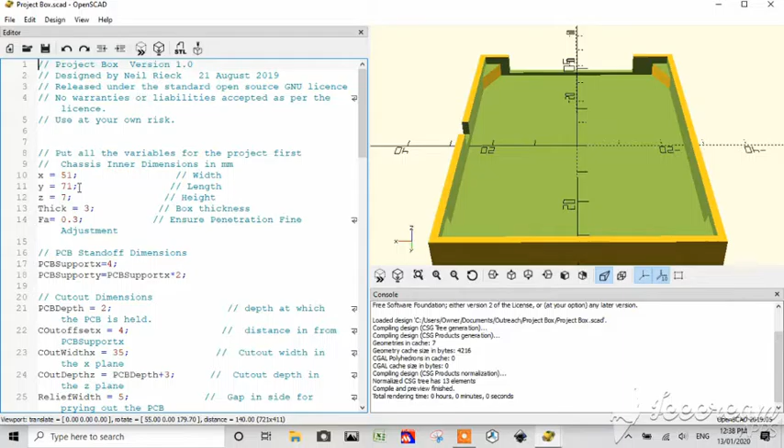Righto, let's get on with it. We have our project box in the dimensions that we want, 51 by 71, with sides 7 millimeters high. You can't see it, but the one we prepared earlier was 7. This is a slightly better design because it's got this cutout to accept the programmer, so we don't have to worry about cutting the box once we've printed it.

It's in the orientation we need to print because we've got this beautiful flat bottom which will sit on our bed. Now, don't worry if your design hasn't got that—the printer will make whatever temporary supports it needs to support the features of the print. It'll actually build a structure to support whatever it needs, and you'll cut that away later.

I don't want to spend too much time talking about this—I want to get into it. So we're just going to render this one more time. This is our render tool.

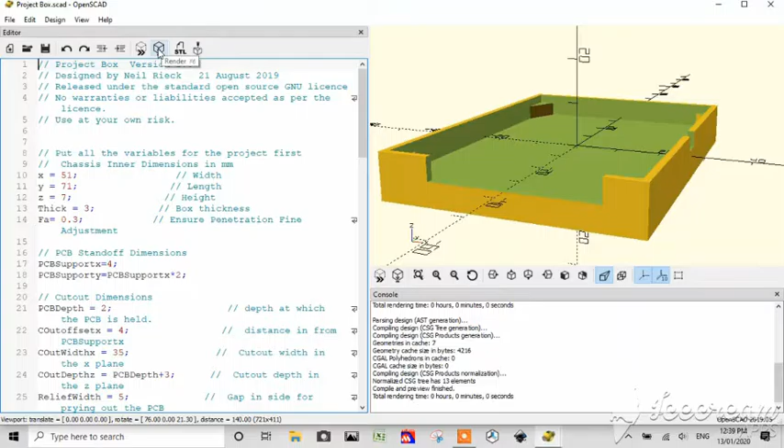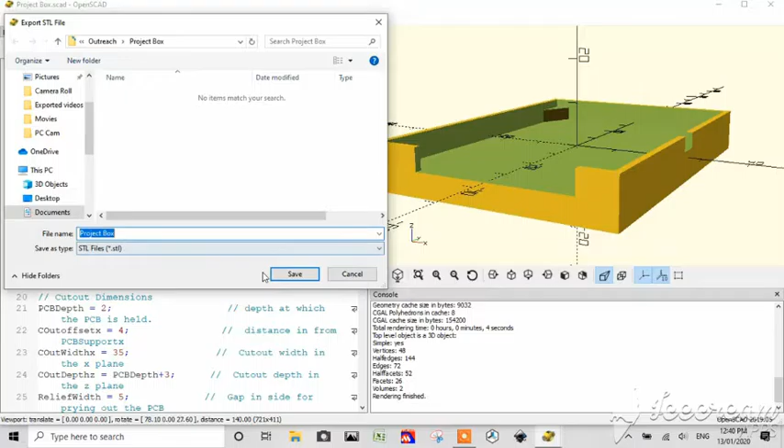So here we go, we're going to export this to STL. It wants us to give it a name, and I'm just going to call it nothing more fancy than Project Box. So I'm going to save that, and in a few seconds here we've got our box ready to print.

Now I'm going to open the Repetier software. Here it comes.

By definition, Repetier out of the box comes with a similar look and feel to what you've just used, except that all of the control stuff is on this side and all the preview stuff's on this side.

So we're going to do a couple of things now. We're going to load this file up that we've just created. We know it's in Documents, Outreach, Project Box. And here it is. This is our 3D file in a standard format that any printing system can recognize. And here it is, sitting beautifully on our bed, that's our bed in the center.

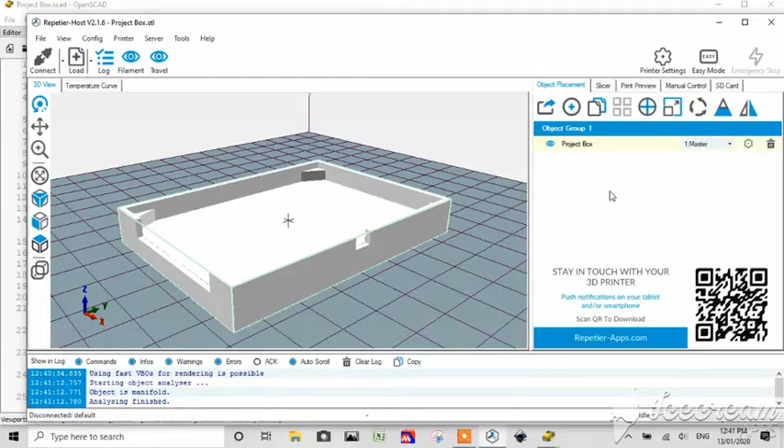Now we don't need to do anything to this. We don't need to change any of the settings in order to make this happen, because now we've got to slice this up into paper thin slices that the printer can use.

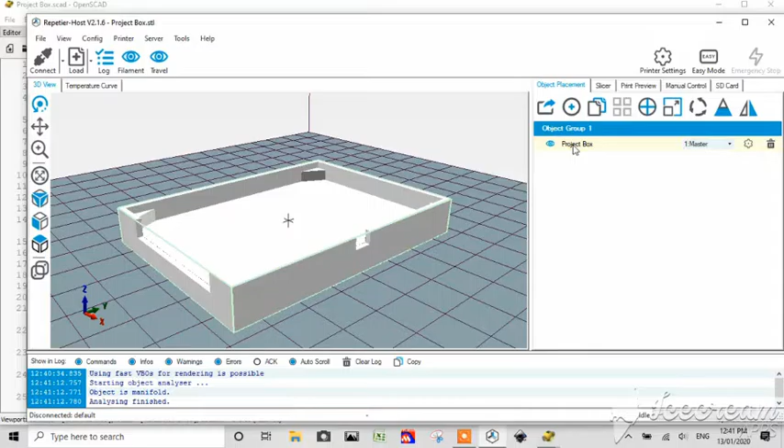So we go into slicing. Now back here I can actually make copies of it. You can copy a design and make multiple printouts, but I don't want to do that just yet. I'm just going to do one.

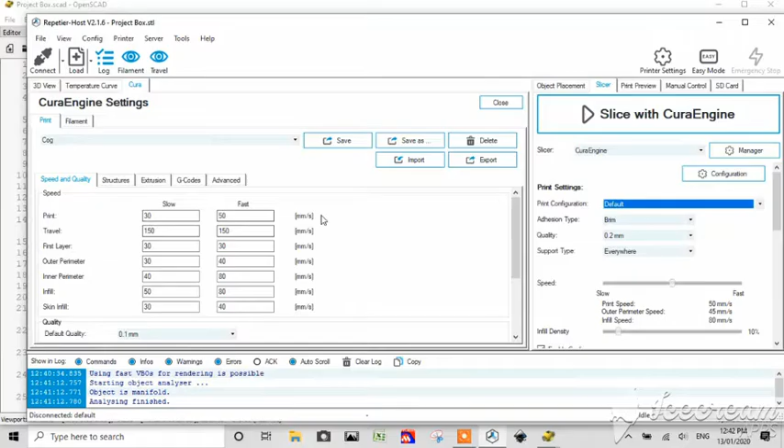Alright, I'm just going to go ahead and do this slicing. Now, I can ask it to use different engines to do this. Let me see this. Right, you can use Slicer, Prusa Slicer, or CuraEngine, and the default.

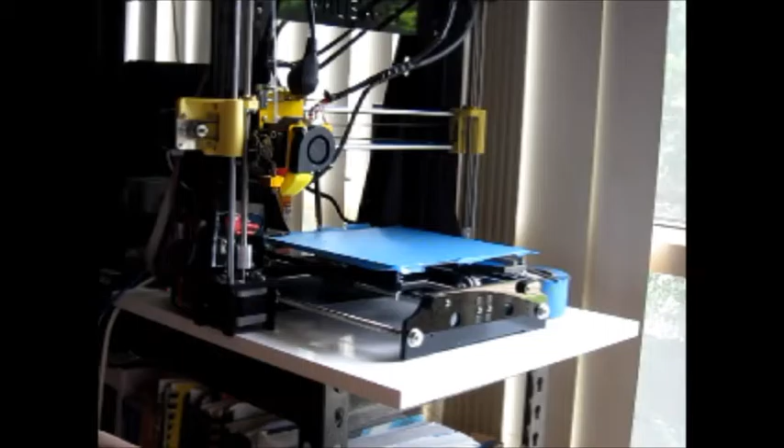And I've swapped the camera to a new angle. Now what I've done is I'm going to plug my printer in to my computer first using that USB cable that you just saw, and I'm going to turn the printer on and let it warm up. So what's going on is I've given it power.

I'm just going to point out a couple of things using this camera. I'm going to leave it in the tripod so you might be able to see a few things. Okay, so what's going on? We're not plugged in, that's the first thing I notice. Oops, let me try that again, just give me a second. How does this happen? Every time I go to use something, someone's had a little fiddle with things.

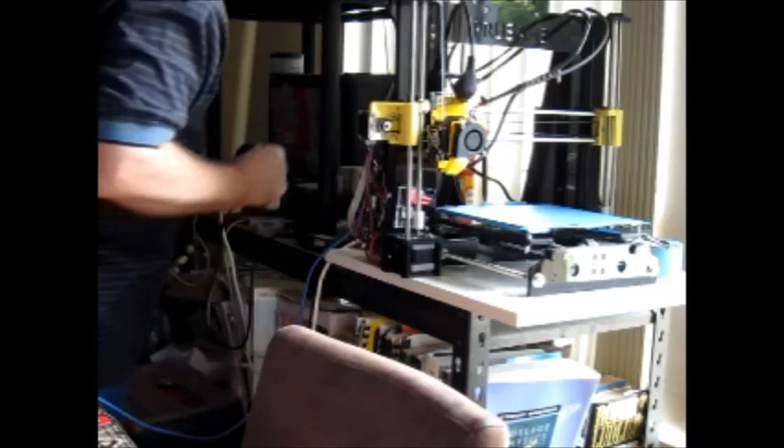Here's the plug, I'm just going to turn all the power off again and we're going to plug in safely. Now, my setup here, because this was built as a kit, it didn't come with some of the standard safety features such as an on-off switch. So I've gotten around that by plugging into this power board with an on-off switch.

Here's my roll of material, my filament, and here is the printer. Now it's not ready to go just yet, there's a couple of things we need to do to set up. The first thing you want to make sure of is that this bed is absolutely clean of any debris, and to do that, you just use a piece of tissue paper, don't use cloth, just use tissue.

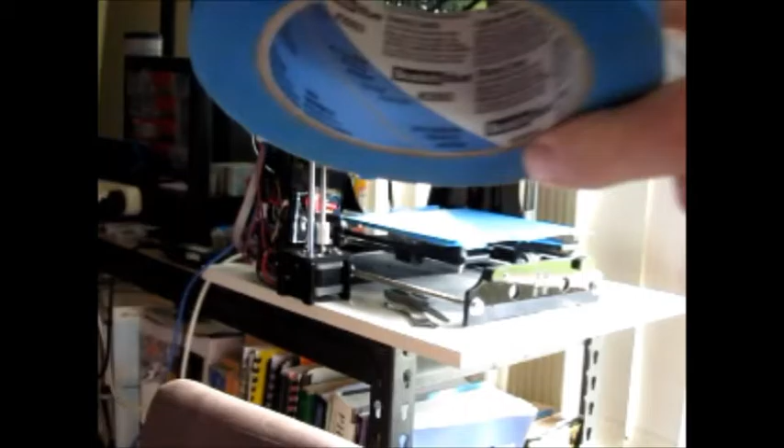Just grabbing the tissue, just a normal tissue, and I'm just wiping any dust off the tape. Now if you want to know what tape I've used here, it's a 3M tape, and hopefully I can show you the number in there - 2093, that's the number.

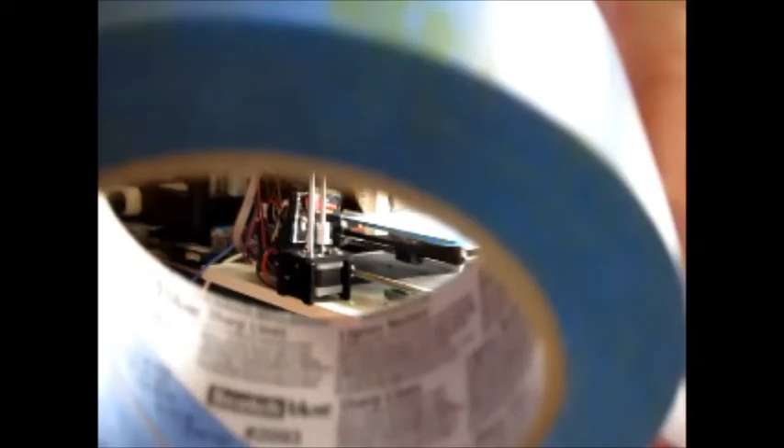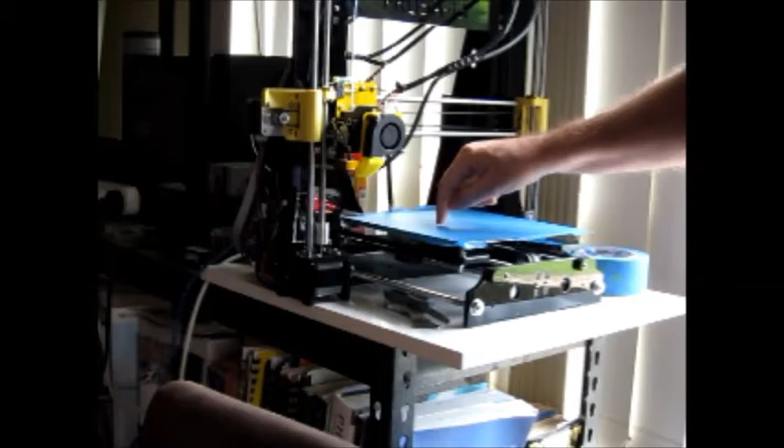And I've used this instead of the single sheet because sometimes your nozzle can misfire or malfunction and tear it, and if you're using a single sheet, you've got to destroy the whole sheet every time it happens, which is what I found with this particular kind of printer.

Now the other thing I'm going to do is I'm just going to go to this hot end and quickly remove anything I can see there, and now we're ready to start printing. I've got a pair of scissors handy just in case I need to quickly snip this filament, right? I shouldn't need to touch that, it should be good to go.

There's plenty of filament. Everything is set up. I've got my two tools that I use at the end of the print, sitting here next to the printer, two spatulas. These are actually iPhone tools, pry tools used to get the backs of iPhones off. I use them for this. I keep my tissue handy just in case, and I'm ready to print.

You want to make sure there are no obstructions anywhere where you've set your printer up. It's got full travel, mine's set up by design. And now we're going to have two cameras. Hopefully I'll be able to show you both situations, one inside the other. I'm not sure how this is going to go.

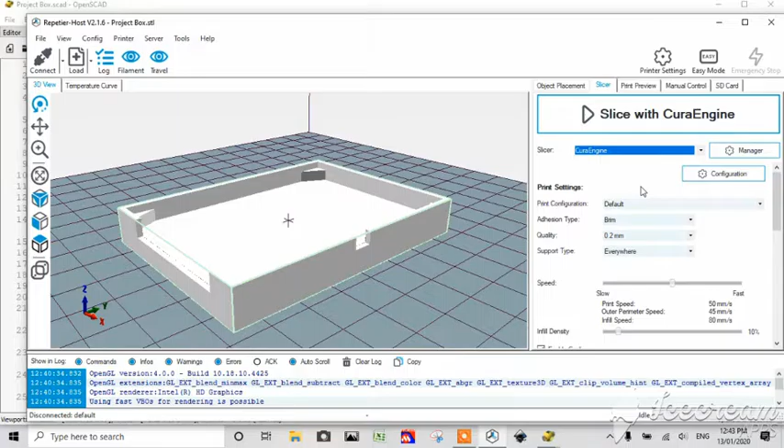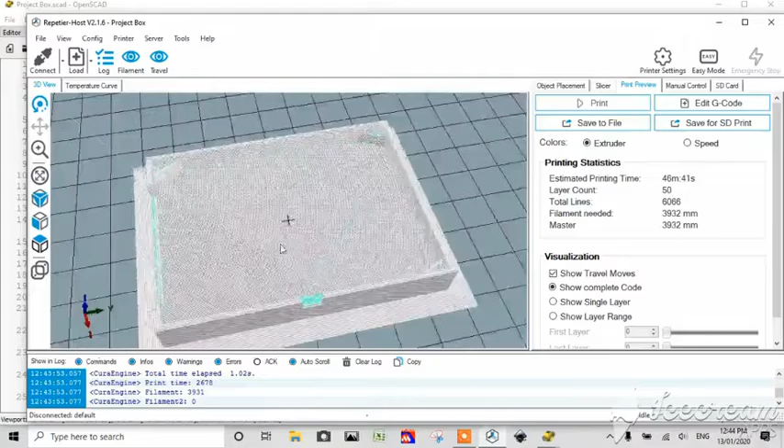And now what you'll see is it's going to go ahead, and here's your box. This is now a series of mapped movements for the printer head from go to whoa. Layer by layer, your printer head will follow those paths, dropping material where you've nominated it to drop the material using your design.

So now what you can do is connect your printer. And at this point, I'm just going to pause this recording.

So what you saw was I plugged the printer in and got it ready, and now I'm going to connect it using this connect button. Something's going on. Disconnected, connect please. Right, see that's changed, now we're connected. And we can just go straight from there to print.

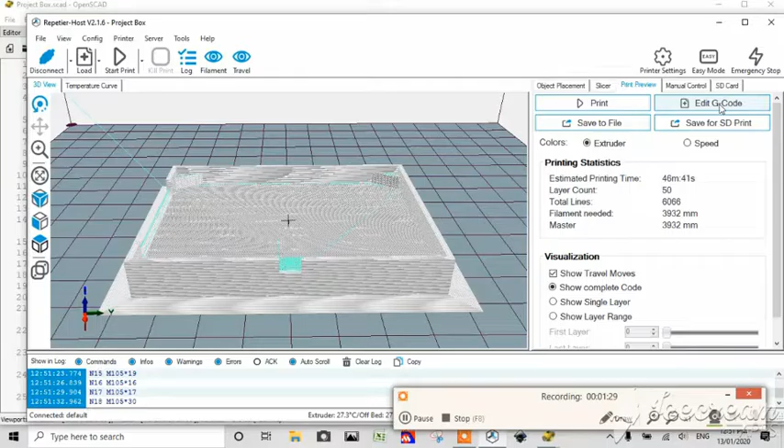Or we can save our file, our sliced file can be saved. It's called a G code. We can get in and look at it. Here it is, generated, blah blah blah, here it is. And you can see it's a whole series of coordinates. It's just moving the print head and telling it what kind of temperature and what kind of rate to push the material through the extruder. That's all it does. I'm going to close that up.

Here's your same print preview. This is what your printer's going to do. You can see that we're on the bed, we haven't put it up in the air somewhere, so the printer's not going to have any problems just generating this. So let's just do it. Print, here we go.

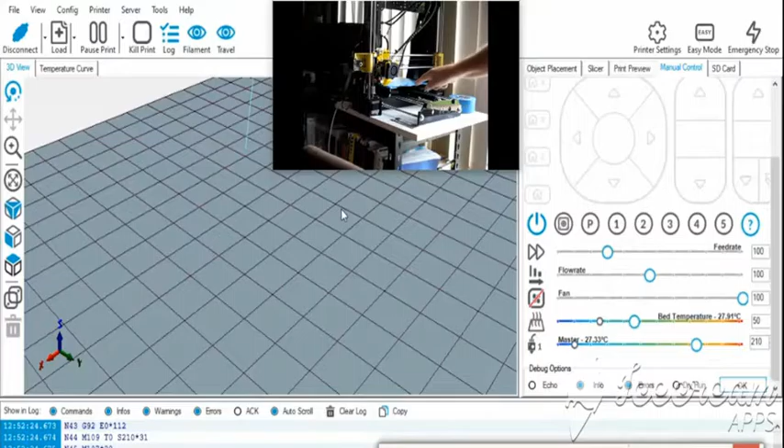Now what I do is I watch the first runs, because what's happening is everything's heating up, and it's zeroing the head at position 0. Now in this printer, position 0 is off the bed. It's worth noting, and that's not a good thing. It's something I'd like to change one day, make it so position 0 is always on the bed. Now the other thing about this printer is it doesn't wipe the head before it starts printing. You can actually program that in, do a cleaning run where it just wipes the head. This particular printer doesn't do that, so I tend to watch the very first activities of the printer.

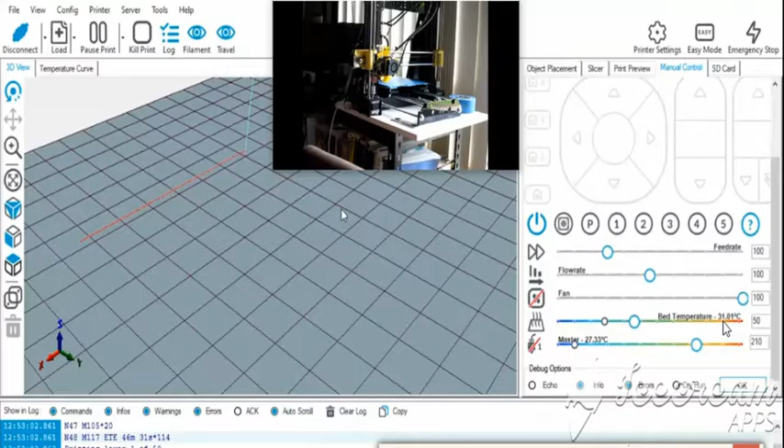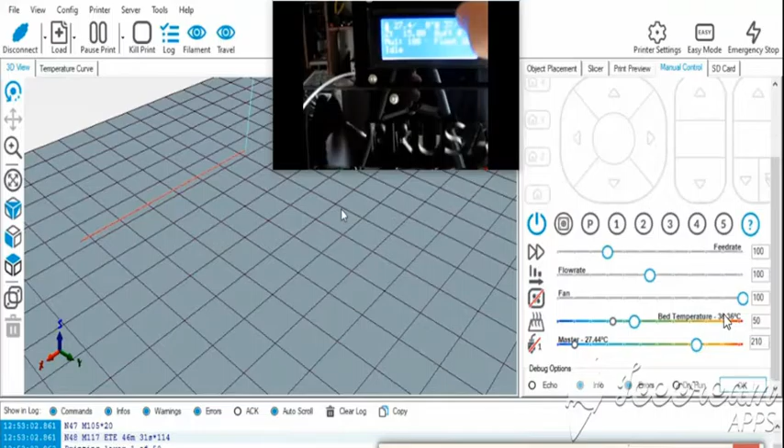Now you can see that the printer, the hotbed, is at 36 of 50. And the temperature of the extruder is only 27.4, it's only at room temperature. So the printer is just heating up at this point. Once that reaches 50 degrees on the right, the one on the left should start. Let me just give this a little bit of stability. We're at 44 degrees, we're still climbing.

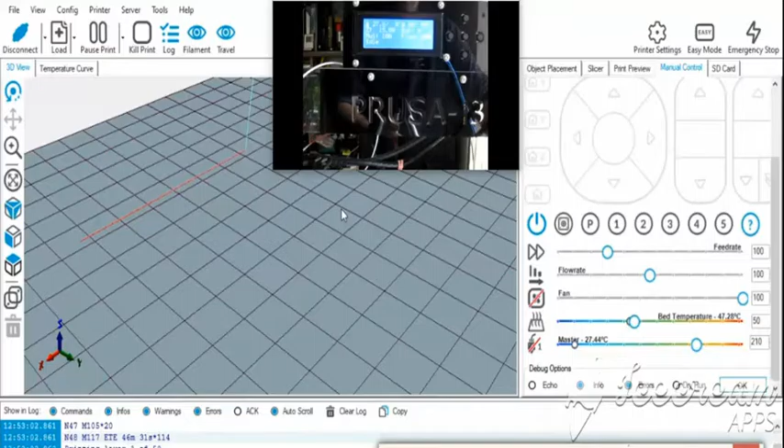You've got to be a bit patient with your system sometimes. I am being very patient with it. We're not at 50 degrees yet. It's obviously 27 degrees room temperature, but it's actually a bit hotter than that, it feels it, it's muggy, humid. Right, and you saw it's reached temperature now, it's swapped over to heating the other element.

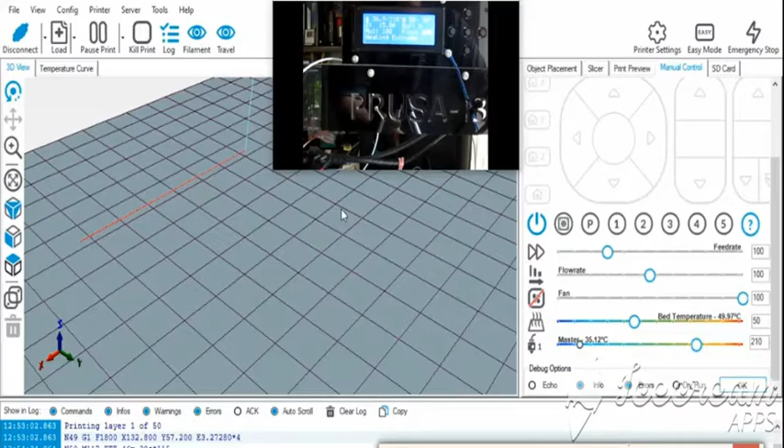So it's going up to 210 degrees, the melting point of the plastic filament. When that reaches 210 degrees, it'll start. 125 degrees and climbing quickly now, 135, 145. Now it's slowing down a bit, 155.

Cool, isn't it? Just got to watch it. Now the only thing I've got to make sure of is that we get good adhesion to our bed. Once we've got good adhesion, you leave it alone, you don't touch it. Now this filament's been sitting for a while, so I expect there could be a couple of lumps and globules that come out of it at the first sign of print.

If they interfere with your print, you've got to shift them out of the road of the print head using your tools while it's moving. Here we go, it's coming down, here we go. We've got nothing coming out just yet. Here we go, it's coming, there we are. See what's going on there? There it is printing, and that's good, I'm happy with that. There's nothing that's going to interfere with that print. If you had any bumps or blobs or anything like that at this stage, you've got to get them off the board real quick.

And what it's printing out is that support network at the base, which is way too wide in default mode, but that's fine. It's going to make itself a really lovely support.

So there we are. We've moved from our SCAD to printing. I'm going to let you watch that for a bit. It's a bit like watching grass grow, I believe, but some people may find the process interesting.

Let's see if we can enhance it so you can actually get right in on the bed. Let's see if I can frame this a little bit better. So you can see it's moving in the X and Y planes, and we're printing out the first layer. It won't move in the Z plane until it's finished this whole layer, the first layer that you saw when we used Slicer. Cool.

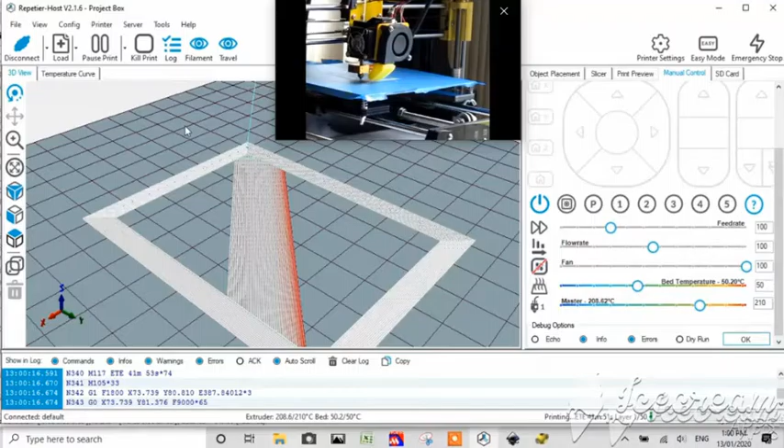So if something goes horribly wrong, such as maybe the filament gets jammed or something breaks or whatever, you can just pause the print where it is, fix the problem, and continue the job, and you don't lose it.

Now there's another really useful feature of this software. It tells you how much time it's going to take, and up here is 40 odd minutes. Now it's pretty accurate, within a couple of minutes.

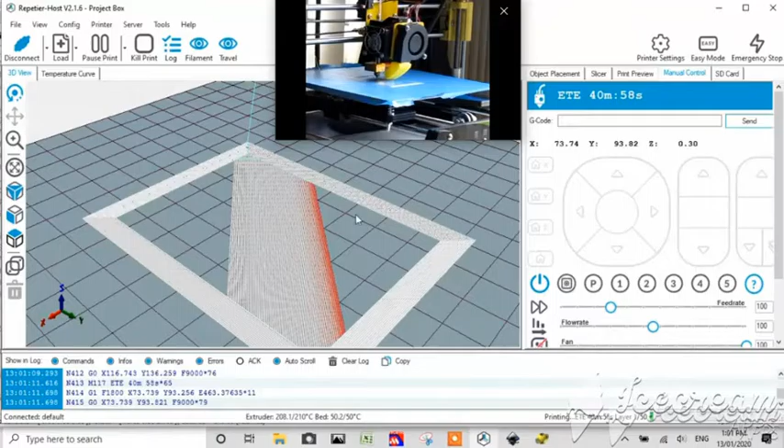So I'm not going to record this thing printing for 40 minutes. But what I will do is let this run and let you observe until our recording stops, maybe on the screen. So the idea is that you're going to see this thing emerge. It's like something coming to life.

It has the same ability to zoom in and out as your standard controls for Windows. We're going to orient it the same way in the XYZ planes as the printer is. That's it.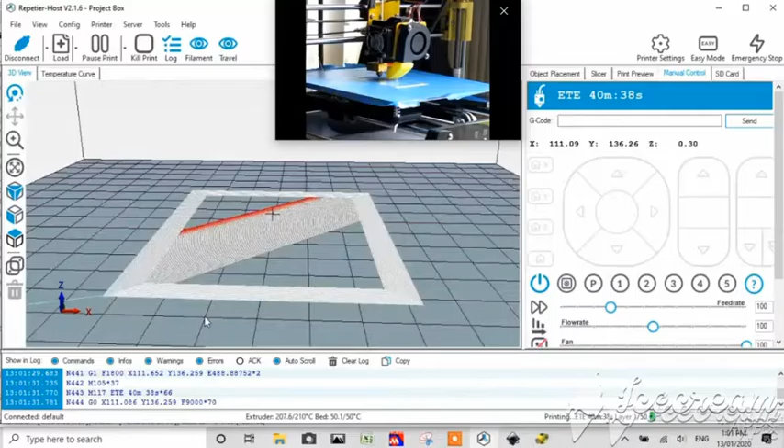So you can see it's actually filling in that base now. Now we said this was going to be 3 mil thick, and at 0.1 of a millimeter it's going to make 30 passes across the bottom before it finishes. Actually, it's telling us here it's 0.3 of a millimeter.

So what does that mean? 0.3 of a millimeter into 3... it's going to be 10 passes exactly to give our 3 millimeter base.

So it's sliced it into 10 passes. This is the first of 10 passes it's going to make. I can put that down to 0.1 and get a much finer result, but it uses more material. Also, it's printing at 100% fill here.

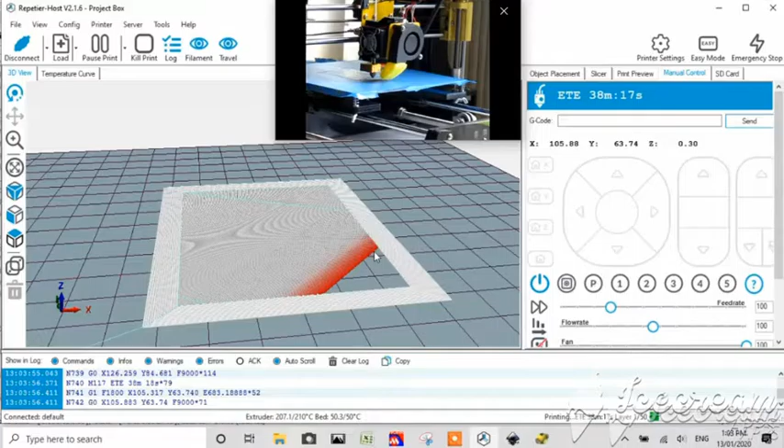I'm going to come back at the end of 5 minutes and turn everything off, and then in about half an hour or so I'm going to come back and show you guys the completed job.

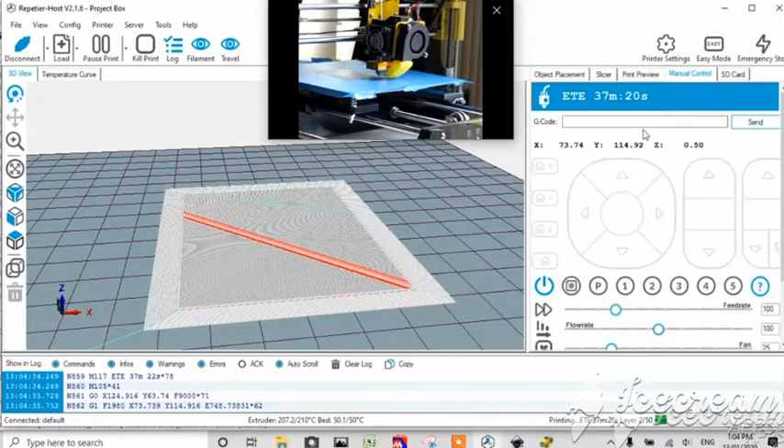You can actually physically hear that thing going faster and faster. Now you can see these ones are a little bit more spaced out. There's a little bit more space in between each of these passes.

So there's only about 60% material used until it gets to these outer edges, and you should see it do a pass around the outer edge at 100%. Let's see what happens when it gets to that.

Right, so that comment was actually wrong. What's going on is it's laying this layer in the opposite direction to what it laid the first layer, and you can see it's added 0.2 of a millimeter, but it's now traversing the job in the opposite direction. The first job went in this direction; now this layer goes in the opposite. It crisscrosses it, which gives it a stronger bonding.

Okay, I'm going to return you to the video. Let's see if I can do this without mucking everything up.

Lot happening. It's like watching grass grow. But I'm just going to bring you guys up again.

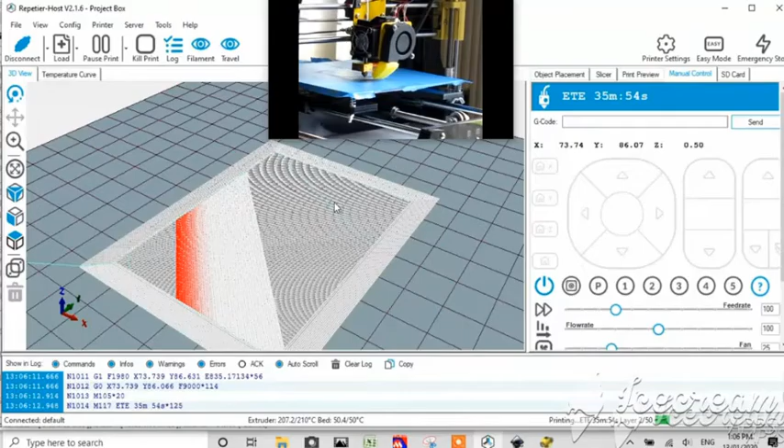What's going on here is I'm moving around the job. I want to try to zoom in, focusing on the head, not on the job.

So there you can see it, the material is being laid down, piece by piece. I'm going to put it back where it was.

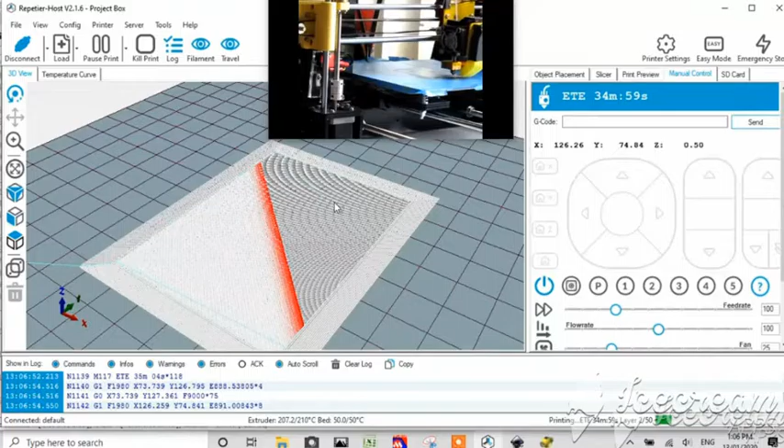So what I'm attempting to do there is show you that it's laying down quite a coarse layer. It's not as fine as it could be, and that's because you can get this down to 0.1 of a millimetre per layer, and we didn't slice it up that fine, nor did we want to, because of the nature of this job being an internal project.

It's only for internal use, and we're trying to save a bit of material. But you can set these settings to as fine a detail as you want, as smooth as you want. It's just a matter of how you set the settings when you run the slicer tab over here.

Right, I'll return you back to the sound. Back at the computer again, once more this is the command it's operating on.

It's already executed 1,200 lines of code. Right, these are the line numbers. You can see here where we're up to.

This layer is 0.5, okay, so it's half a mil. This is what we mean by less fill, less detail in the center.

Okay, I'm going to correct myself again. This means the job is half a mil high, and it's got to go to 7 millimeters. So I'm just misunderstanding this reading. I thought this was the layer thickness, but what it is, is the Z position. So we're at half a mil high in the job. Just ignore whatever I'm saying here.

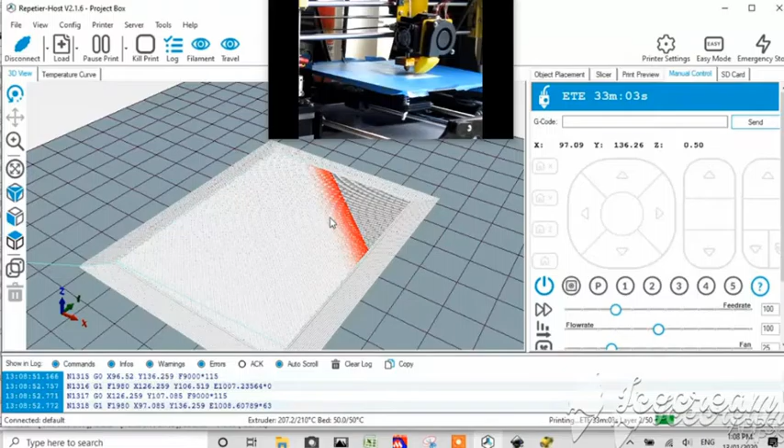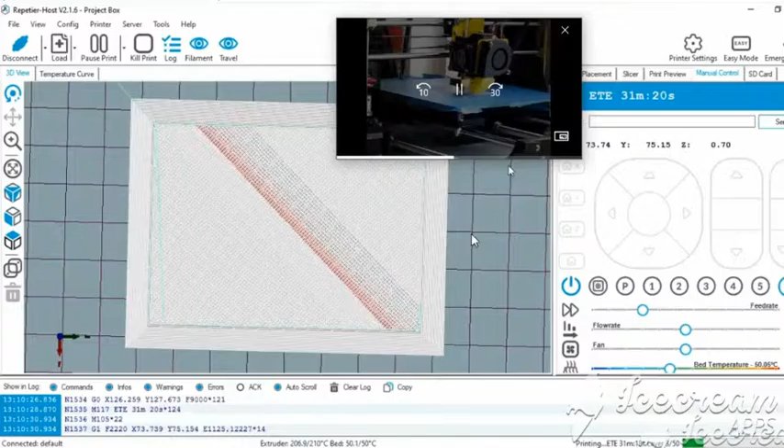Right, so what you can see here is I'm playing with the zoom. The same controls are available to you in Repetier as are available in Windows, so it functions exactly the same way. You can use your wheel mouse, you can zoom in and out, and here you can see the printer.

Okay, I've mucked something up here. Thanks. The printer is being commanded, executing each one of these things, and it's being represented to you on this control panel on the left.

And you have full control, and this is going to continue now until the job finishes in 30 minutes' time. So what I don't want to do is record a printer working and a machine showing you status screens for another 30 minutes. I think that would be quite boring.

But there are some interesting things coming up. For example, when it starts to print the fill layers between the exposed sheets, it won't print solid. It'll just print a matrix on which it can print the outer layers. So the infill layers are actually quite interesting to look at.

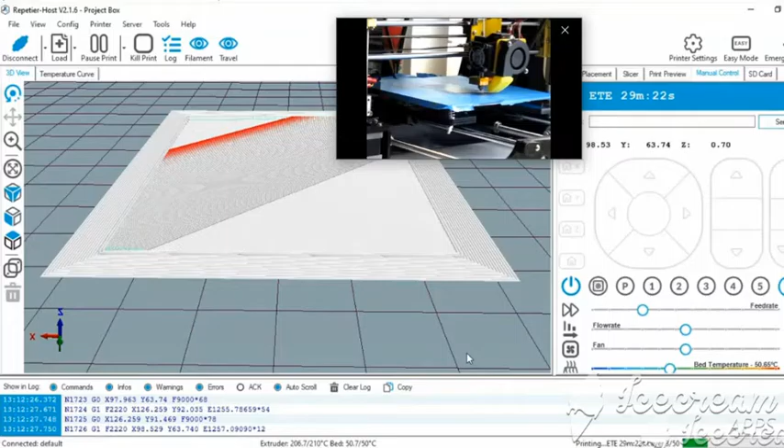And what we might do is cut the video here and bring you back in when it's doing the matrix, the infill layers. You can see I haven't quite mated up the video to where it's up to, because this is obviously at a different point, but it is what it is. I'm not an expert photographer, and I'm not an expert editor either, obviously.

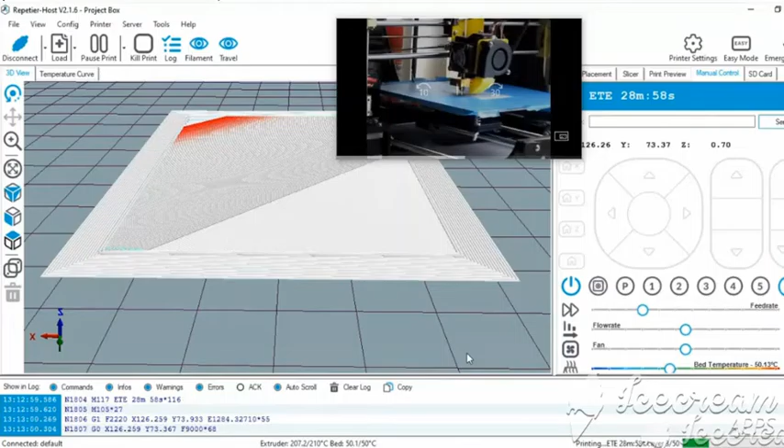Right, I'm going to pause the video here and we're going to go forwards with the next bit. So pause, please. Actually, just pause it. I'll just move this out of the road.

Every time you move something, it'll... we're 25 minutes to go. And it's almost finished putting together the grid.

We're at 1.9 mil. We want to get this up to, we said it was going to be 3 millimeters, so when it hits 3 it should start giving us a full mesh again.

2.1, come on man, you can do it. And I think when it gets to about 2.6, it'll start giving us a full mesh again.

I was wrong about this. This is the Z position, so this is 2.1 out of, when that hits 7 we're at the top. And that's what it bases this on.

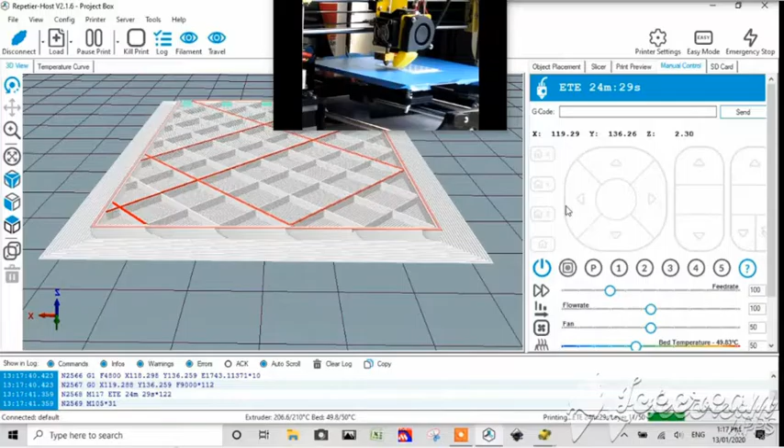Obviously I've worked out I made a mistake with that measurement, and it actually doesn't base it on the height. It bases it on the percentage of commands it's executed, shown in this little status window. I don't know how many commands are yet to run, but it's based on the number it's executed, so it's a fairly rough estimate, but not a bad one. As I said, it's usually within a couple of minutes, and some of these will take less time to execute than others.

Back to sound. Not a lot happening.

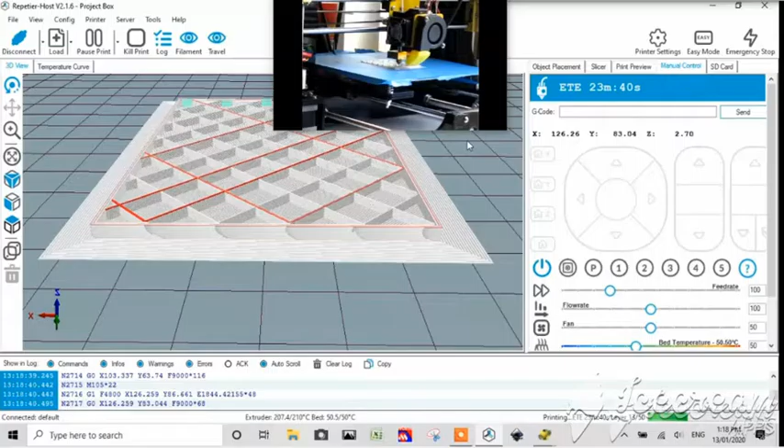We want to see this hit 3 mil. I'm going to bring you back up on this other camera so you can see that mesh up close.

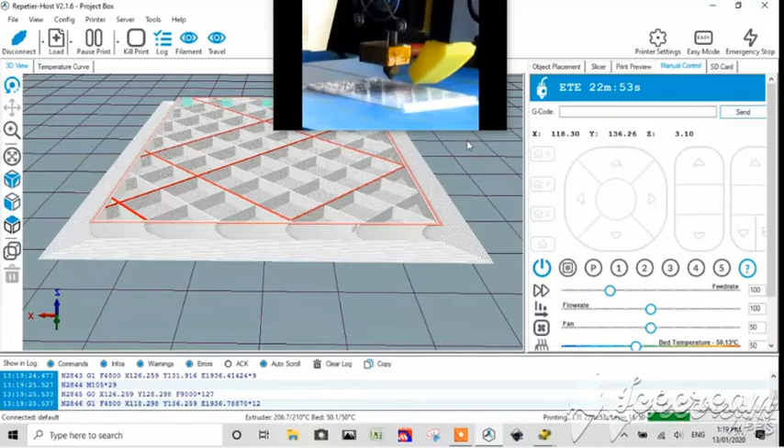You can see that pretty well. This particular unit, that big yellow nozzle at the front is blowing cold air onto the extruder, so it's cooling that plastic as soon as it hits the job. As soon as it comes out of the extruder, it's actually solidifying and bonding, so that makes this quite a good printer.

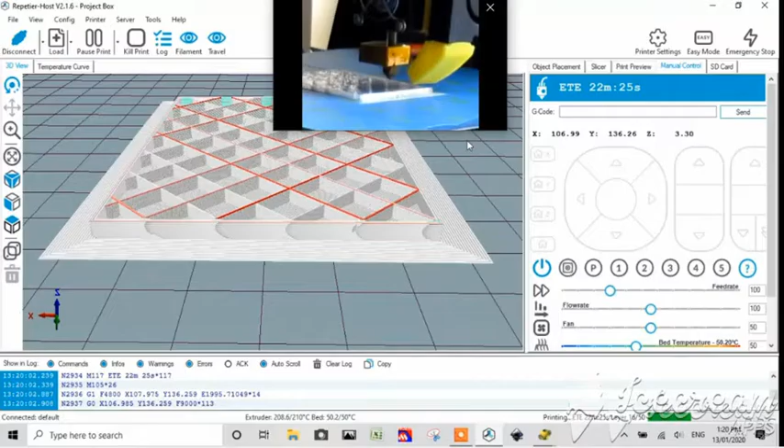It also means that your job is fairly cold once it's finished, and you don't have to wait for it to cure before you can remove it. It'll cure quite quickly. That's what I'm talking about, is that nozzle there.

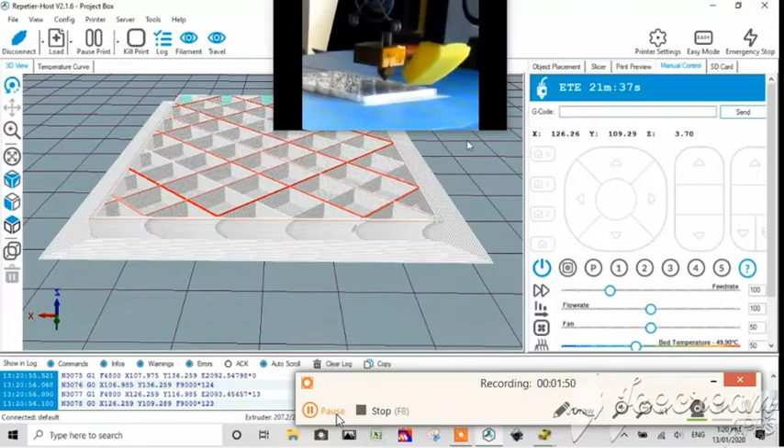Okay, I don't know why we didn't stop at 3mm, but we didn't. So obviously there's something wrong with our thickness command, because I expected that to stop at 3mm.

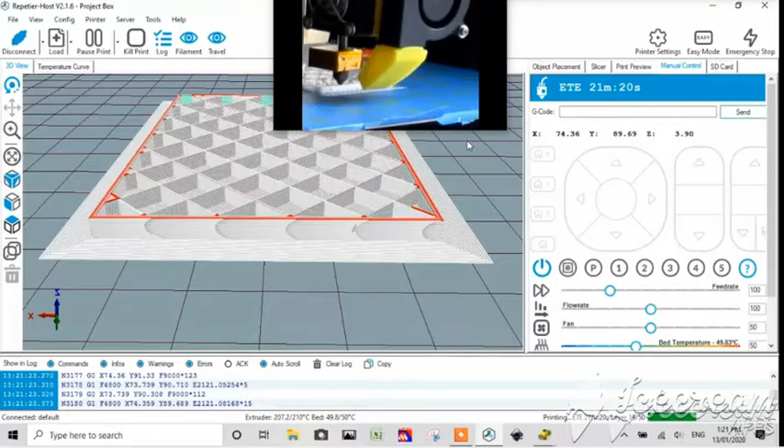It happened at the worst time. Here we go, it's filling them in now. 3.9 - so I don't know what happened to our thickness setting, but we're a millimetre over the top.

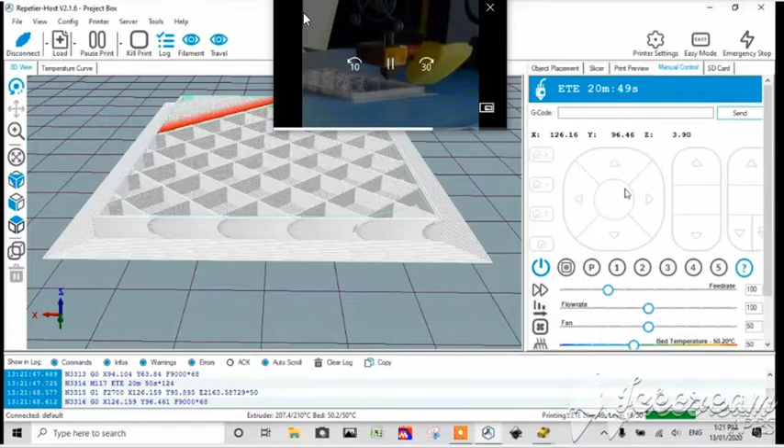Go figure. That might have something to do with this base layer. It puts this down in order to give it good adhesion. That's something done by the printer, it wasn't done by me, but I don't mind that. Again, this is only for internal use, it's not going out to the public, so I don't particularly care.

If it were going out to the public, I would have to sand that back. I would have to shave that 1mm off it.

How cool is this? So this is now laying the most - well, if this was going to fail, this is where it would fail, right here. I'm going to bring you in so you can see what's going on.

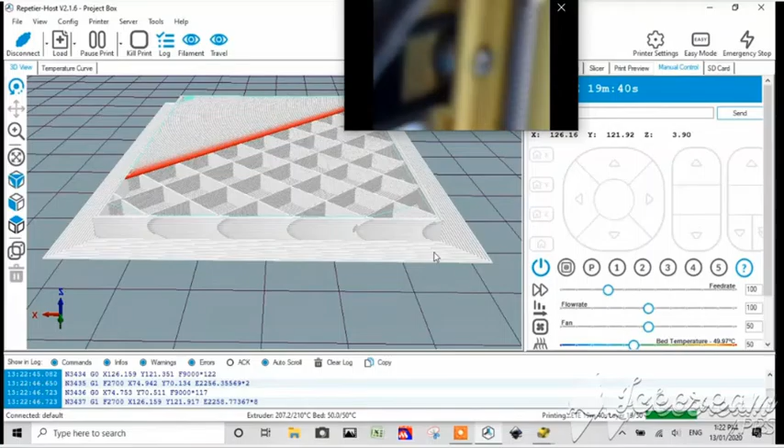Oh dear, where are we? Oh, we're all over the place. Here we are, we're down here. There's the material being deposited - you can see it's only a loose lattice. It's not really tight, it's just giving it a basis to grab on. For the next layer, it'll start becoming tighter and tighter.

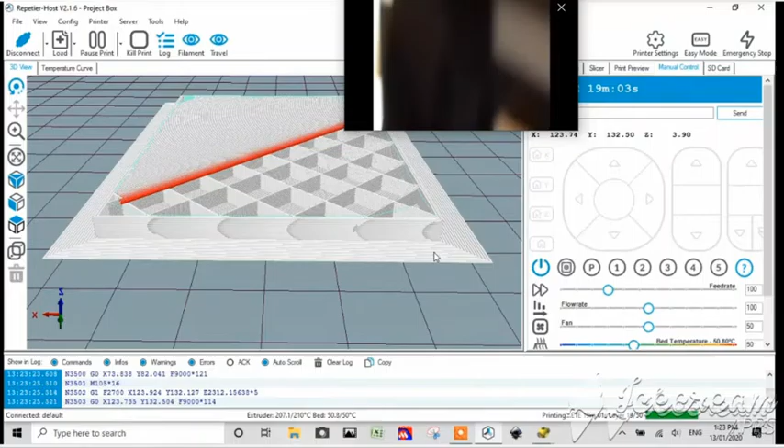I reckon the people that invented this are extremely clever. We're running low on battery - let's hope it lasts the distance.

You can see it going on there anyway from that angle. It's just laying that filament down in a very loose arrangement, and as soon as that filament hits the air, it's getting hard. So it's actually providing a matted bed on which to lay down the next layer.

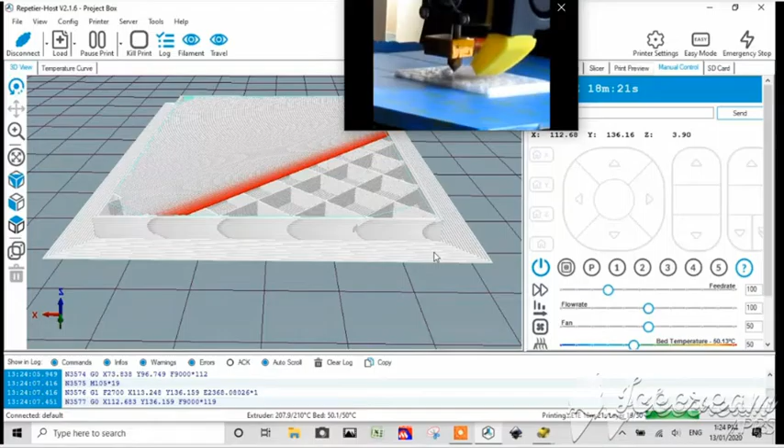Now you can imagine the kind of engineering that goes on, and the professionalism and the pride of the people involved in putting this together, to give it to you for free. That's something, that is something. Without them, I wouldn't be here doing this stuff.

I'd be mired in a pool of debt, trying to recover. This is possible to do for free, right? On a small scale, you can do these things. When you get bigger, you've got to get away from 3D printing your things into plastic extrusion, and that's the next level.

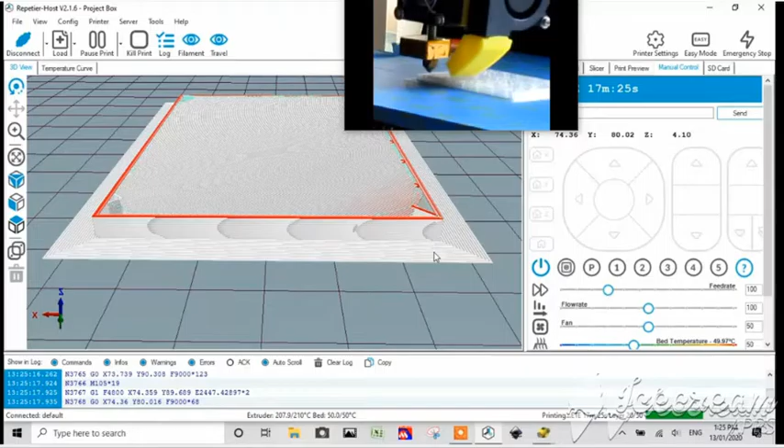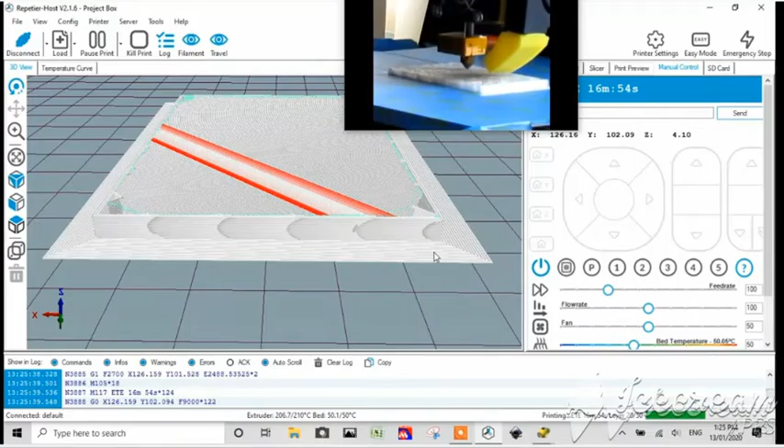But you can use your 3D printer to develop your mold - how cool would that be? I can actually print my molds up for this, for the plastic extruder, and we can print them out in metal, in aluminium or something. Although I know that for the extrusion, they have to be in stainless steel, or a high grade of steel. But 3D printers nowadays can definitely print out in metal, and glass, and ceramic.

All sorts of material can come out of these 3D printers. Human skin comes out of them, I think - human tissue, whether it's skin or bone. I know they print bone.

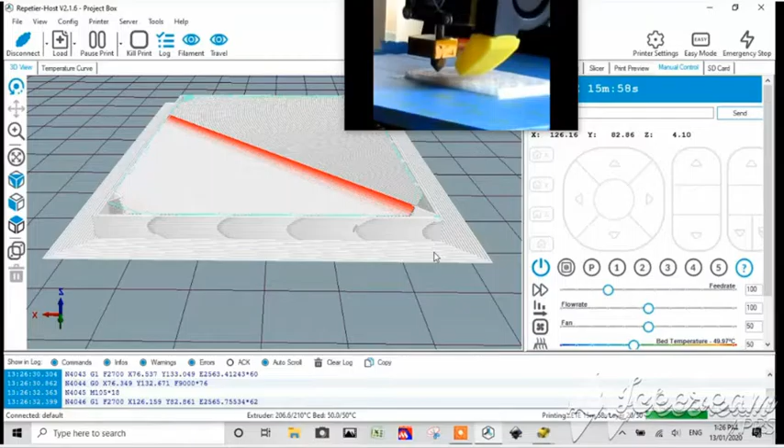That's quite a thick box. I can see it's nearly 4 mil, and that's probably a bit more than I wanted, but that's fine.

As you can see, our PCB supports are not completely filled in yet. See that? They're still hollow.

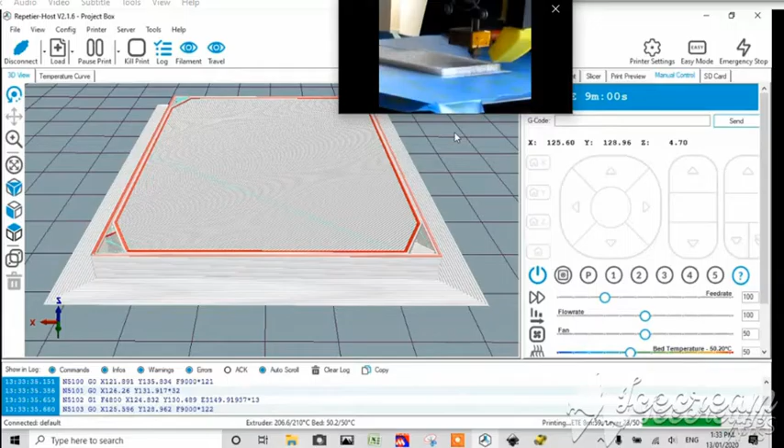So it's finished doing this base layer and it's now working on the walls. We should soon get up to our relief cut and our PCB support tops.

It's ripping through it.

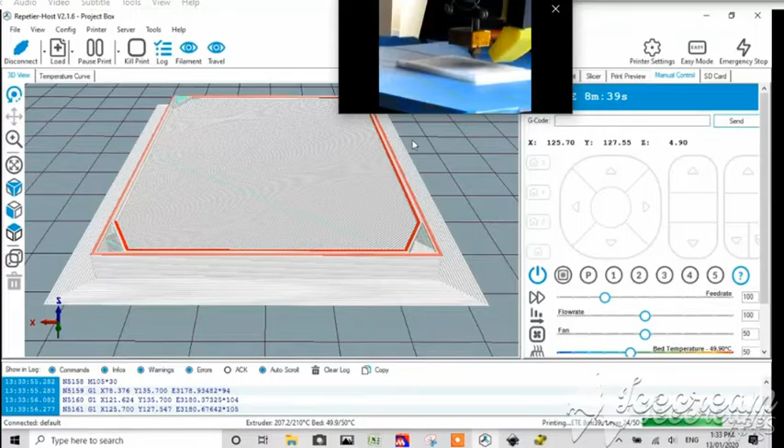I'm sitting here just drinking my cup of tea, absolutely mesmerised by what's happening on the computer screen.

Now you guys can see what I'm looking at. I'm just looking here at the value - I can see that the extruder is actually at 207 degrees. It's a little bit colder than the required 210. The bed's spot on.

We're at 4.9 millimeters in. We expect it to stop at around 7, maybe 8, depending on what it did with this base.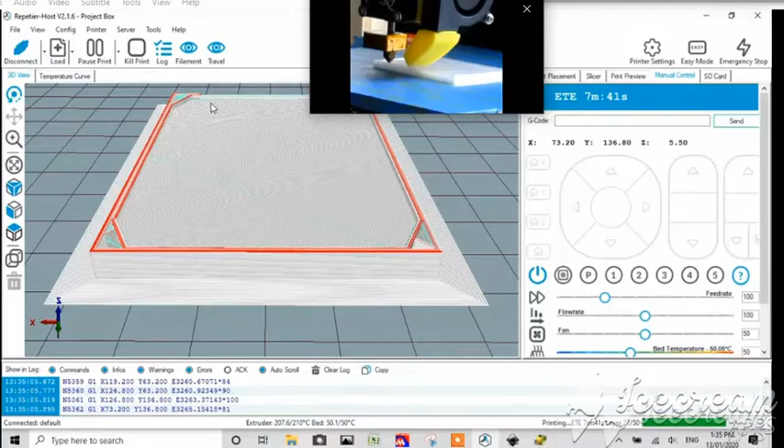And now you can see the structures are starting to form. Here's our relief cut, this is our interface for our programmer. Ripping through the level.

You can see here we've got our relief in there. This is for the programmer interface.

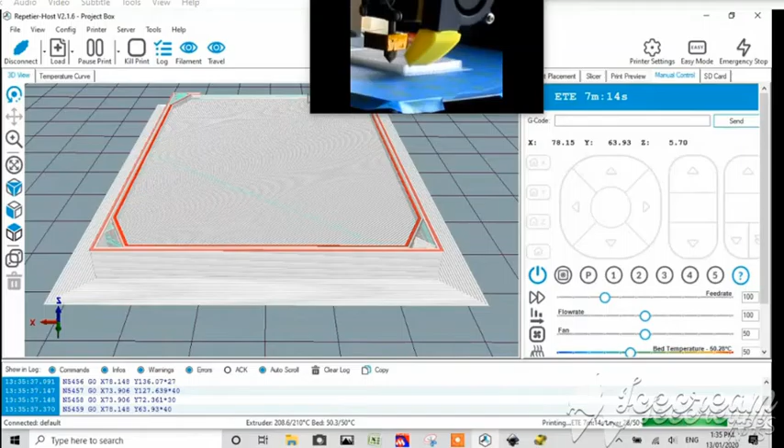Well, I'm rather impressed by this software. It's pretty cool.

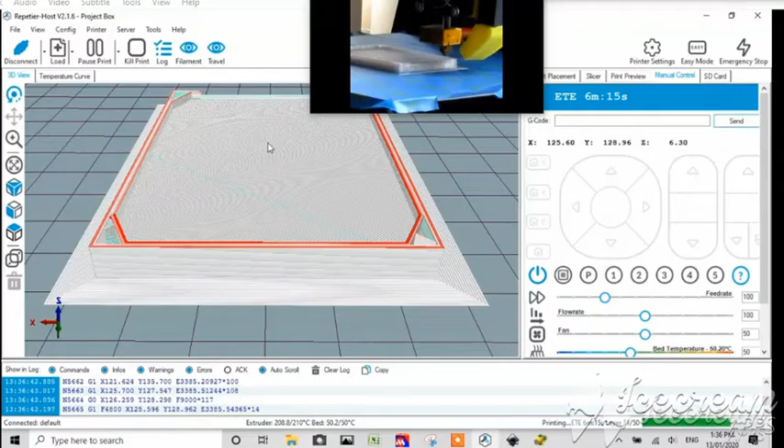It's interesting that what we're seeing on the screen is very closely represented by what's happening over there on the printer. It's not as fine detail, of course, on the printer, because we didn't tell it to be 100% fine detail - we told it to be about 60% fine detail. And that's good enough for our needs.

And when I'm looking at the box, I can tell you, it looks pretty close to what we're seeing here on the screen, with one exception. As we look at the printer, that's what we're seeing - so this is the front facing the camera.

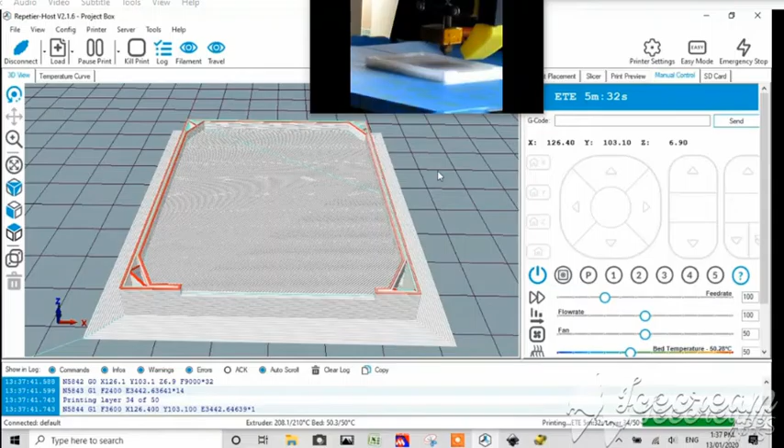Alright, I think we're starting to see the relief. Here's the relief. Now, here it is. So we've got 1mm, I think we said 1.5mm to the tops of these from that point.

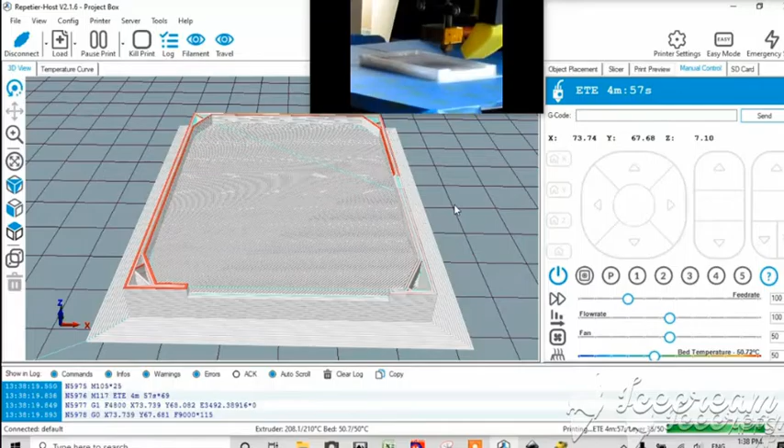Okay, we just lost the other camera - I ran out of battery. Gosh, okay, so at this point I had problems because I didn't charge the camera up before I started filming, and I ran out of battery. And I'm no good at using these things as cameras, I'm terrible at it. But I tried to get it on my little iPhone - as you can see, it's an older one and it doesn't have a lot of storage. So I had all sorts of problems trying to A, free up storage quickly, then B, get it on camera, and then C, get it off this onto the computer. I'm not real good with these Apple iPhones, you know, and that might sound stupid, but the fact is I'm not a camera person, never have been. But that said, I'm going to continue moving through this with what footage I have got until I hit the end of it. So just bear with it, and excuse the camera work.

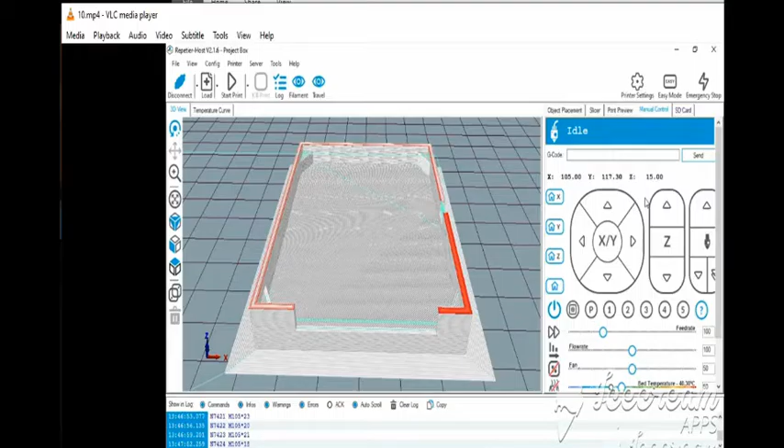Set this up. I'm going to turn it this way and sit it there. I just want you guys to see what goes on. So the job's finished.

I've set the iPhone up, and now what I'm going to do is push the print head up a bit. Now I'm going to push home X, and now I'm going to push home, I want the Y to move out - I want to push the job clear of the printer so I can get to it. So Y is at its max, X is at 0, and Z's at 15. I'm quite happy now to hit home Z, and the print head will move out of my road.

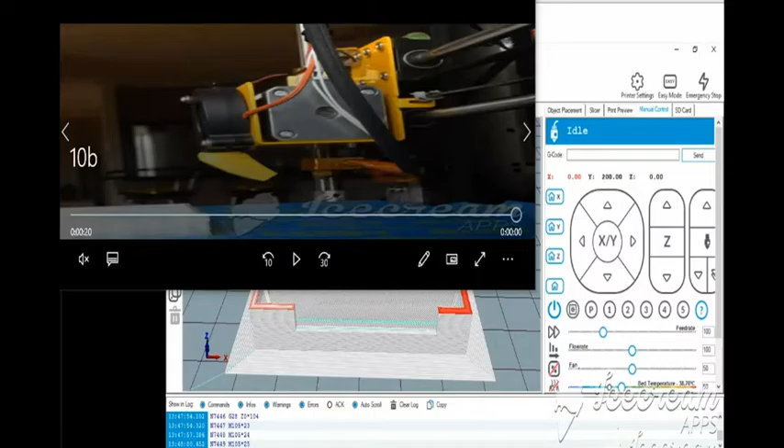So what that has done is it's put the job out here. You can see when it finished, it gave us a little bit of moving - there it is, a little bit of moving. Right, so there's the job completely, it just popped straight off, and you can see there I've damaged this piece of tape, so I'll need to replace it, which is better than having to replace the whole lot of it. But there's our box.

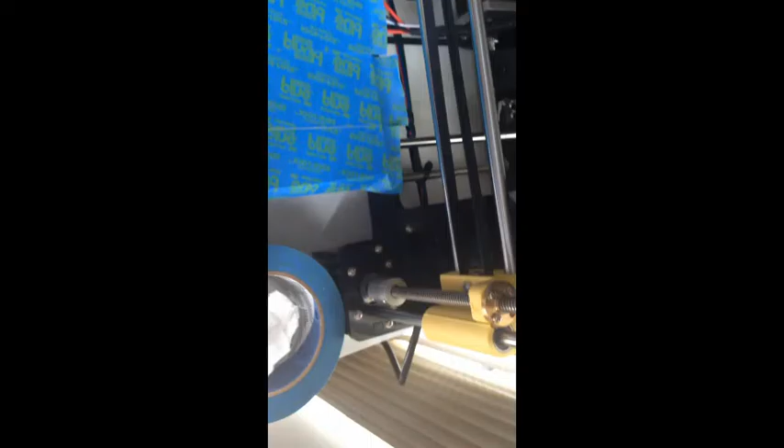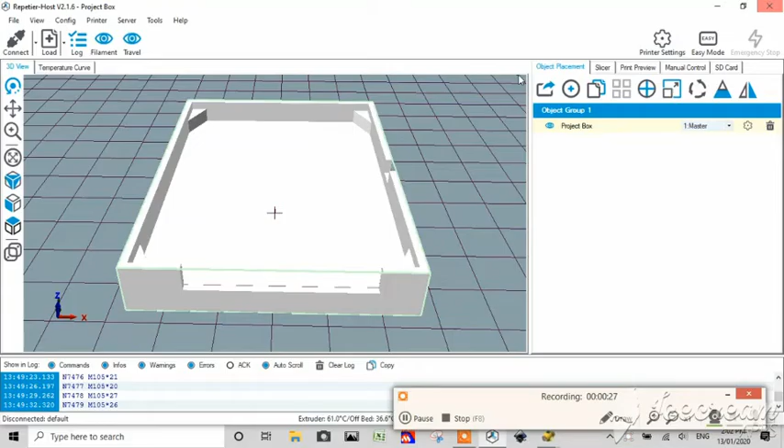Now I'm going to move to the other PC. So what happened there is we turned the power off, so our printer got disconnected. There's no reason we shouldn't just shut this down now - let me do that.

Here's our original OpenSCAD. So just to recap, it was preview it, render it, create the STL file. Now we didn't use this one.

Well, look at that. It's got a 3D print option in OpenSCAD. I didn't even know that was there. I wonder what that does. Let's use it.

Print a thing. Okay.

Wow, look at this. Oh, it's connecting it to the internet. Righto, so that's an internet service. I don't particularly trust internet services, so I'm quite happy with my Repetier host. But...

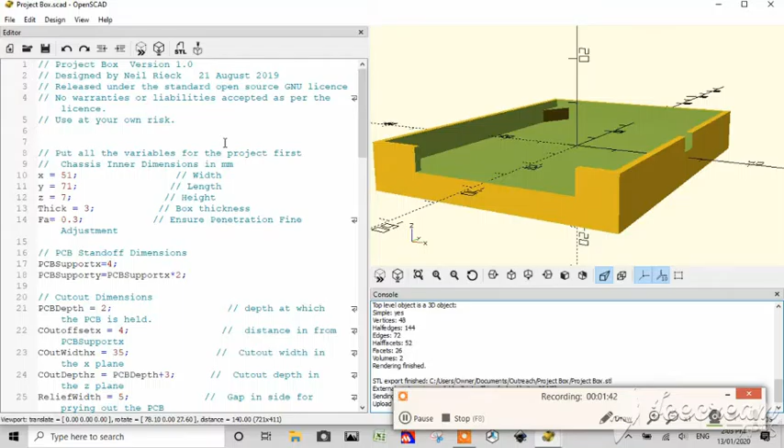Yep, you can send it to that. You can also send it to the Windows one. Windows has its own 3D print viewer, and it will print out your object to a 3D printer.

I don't use any of those. I tend to stick with what I'm familiar with, and I'm familiar with this Repetier host, which is what I've used, this one down here. I'm also familiar with OpenSCAD.

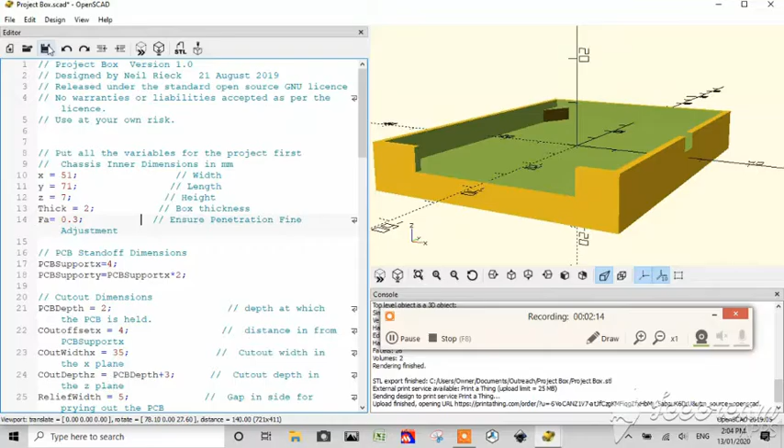I'm going to change this to 2 while I think of it. I want to just change that to 2 because it doesn't need to be 3, it can be 2. I'm just going to save that, and I'm going to close down OpenSCAD.